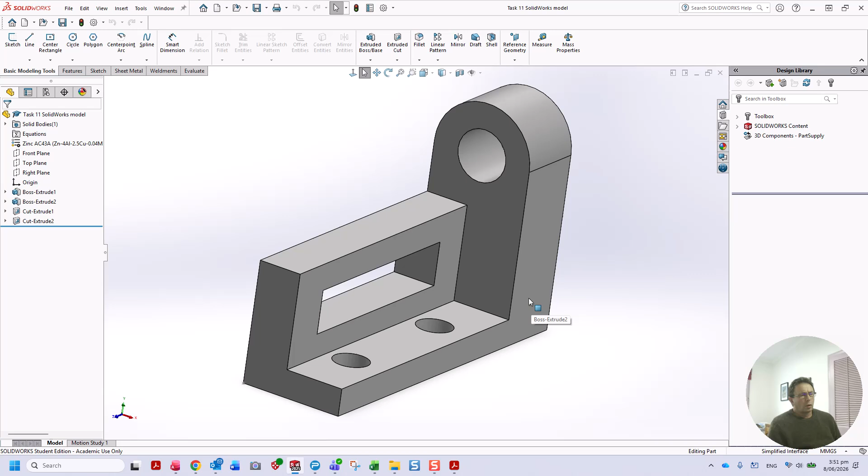This is just a quick video to demonstrate the orientation and the kind of views that you would get for the two parts that we want you to draw for General Literacy Assessment 2. So I've got these both open in SolidWorks. That's our welded yoke, and that's the bracket that we ask you to draw for assignment 2, task 11.

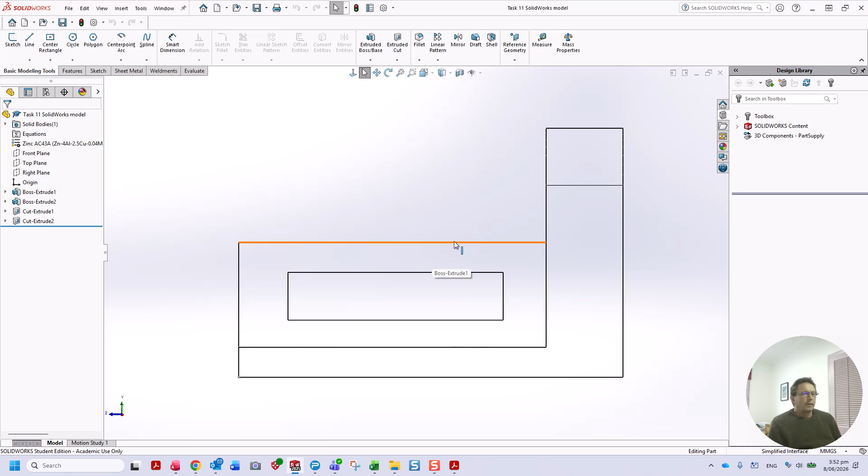So our orthographic views will be one like that, which is our front elevation, and if we spin it around, that's our end elevation. And then, that's not quite right, it's tipped around on its side, but that's essentially the line work that we'll have for our plan view.

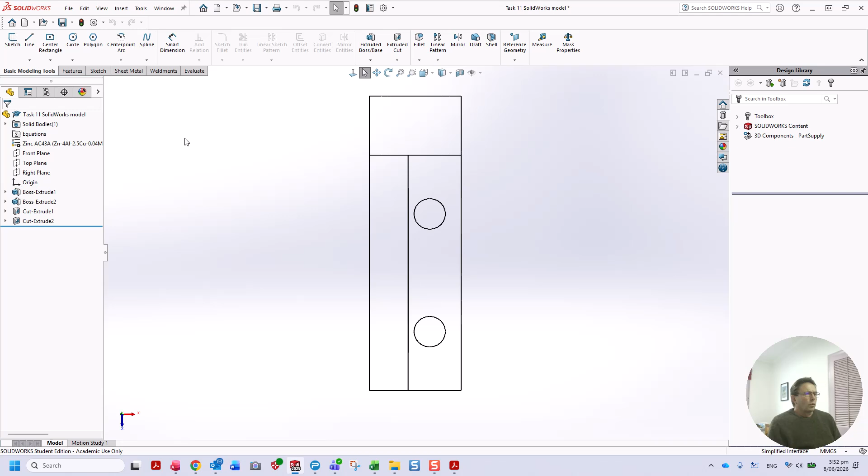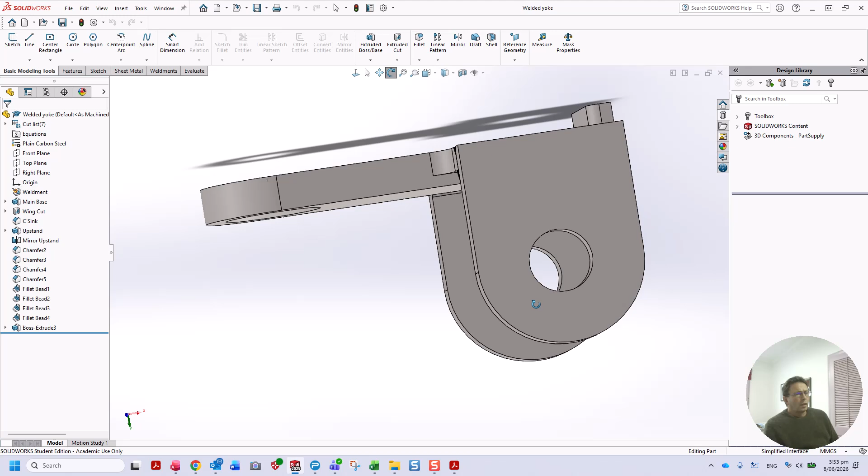Similarly, if I go to the welded yoke, our front view could be from there, and top view, it's just rotating it around, but it doesn't really matter. That's essentially what you can see from the top, and we will have a view that looks like that because we need that view to dimension this radius. There's no other way of doing that without having that view or dimensioning it to hidden detail, which we don't like you to do. So that's how we get those orthographic views from the isometric.

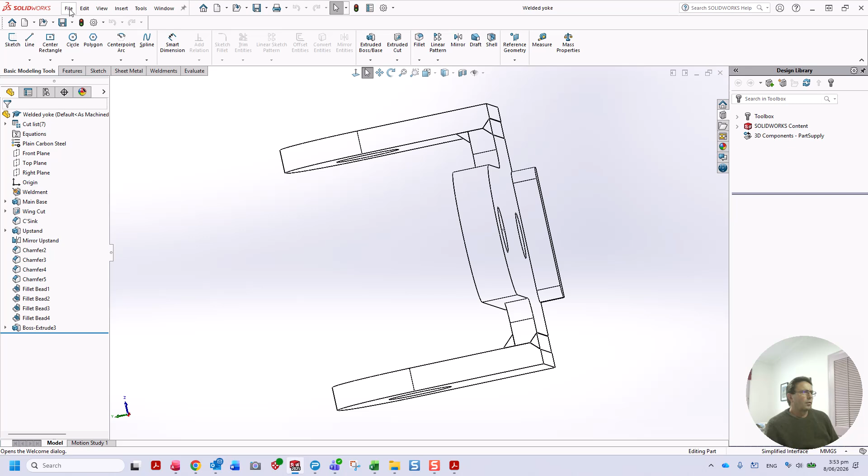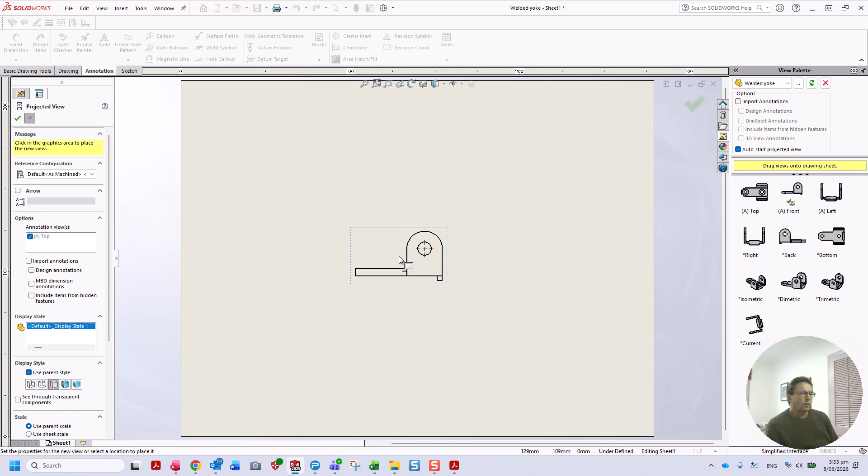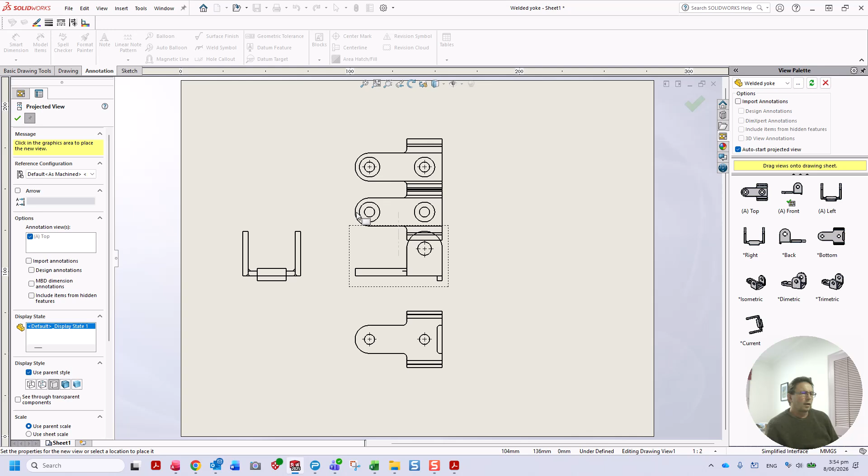So if I go File, make drawing from part, turn that off, so we've got a blank sheet. Okay. So you have to decide which view is the most useful, but let's just say we're going to pick this view as our front view, and then our top view looks like that. The bottom view looks like that, and we'd probably want a view from the end because we need these widths. We could dimension it from one of the other views, but I think it's better that way.

And hopefully you can see from here that looking down on that surface, we're looking here, looking up from underneath. I might actually just add another view there. Get that independently. So I'll just make that solid as well. So that's looking at the underneath of the thing, and that's what we get when we look directly from underneath. That's directly from in front, looking from that direction, etc. So those four views are what are needed to depict this thing completely.

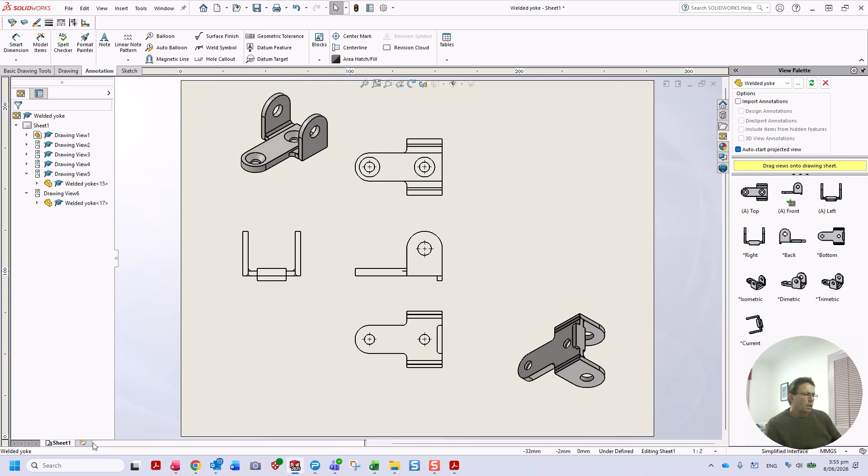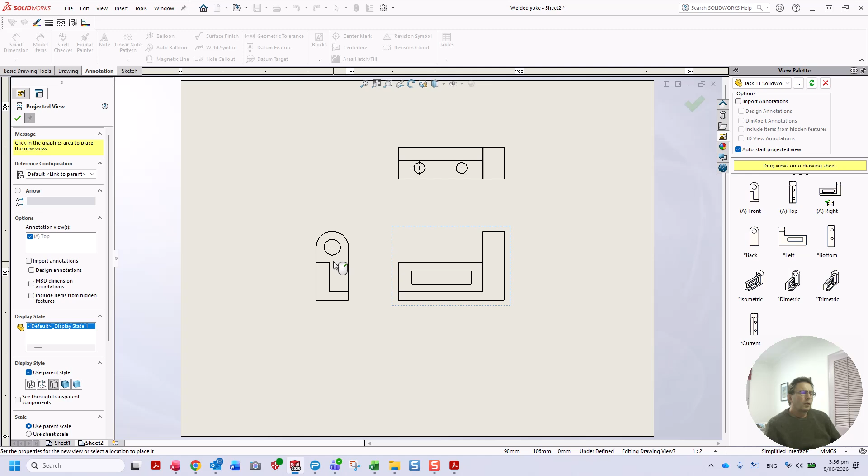So we'll just add another sheet, and our other part. I think that's the view that we want from the front. That's our top view, and that's our end view, and pop the isometric up there. It's not quite an isometric, but a pictorial view. You can see that if we look down from above, that's what we see there. If we look from this direction, that's what we see. And if we look at the end from that direction, from here inwards, that's what we see.

So hopefully that's food for thought, and those are the three views that we need to, oops, and now I'm stuck. And here we go. Okay, so those are the three views that you need to depict this thing. And for the orthographic drawing, we would probably suggest that you might want to have the hidden detail and all the center lines showing.

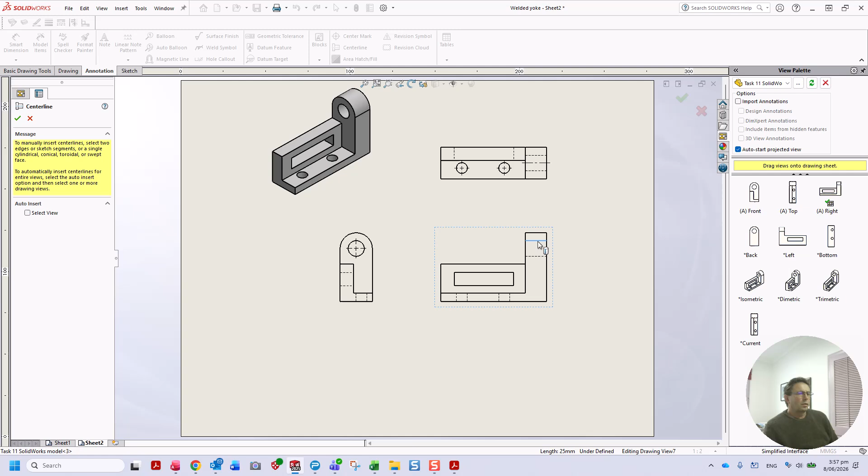So we would put a center line there, there, there, and there. And then we get on and dimension it. But hopefully seeing that all together makes it a bit clearer about how the orientation of the views is in an orthographic drawing when taken from an isometric or pictorial.